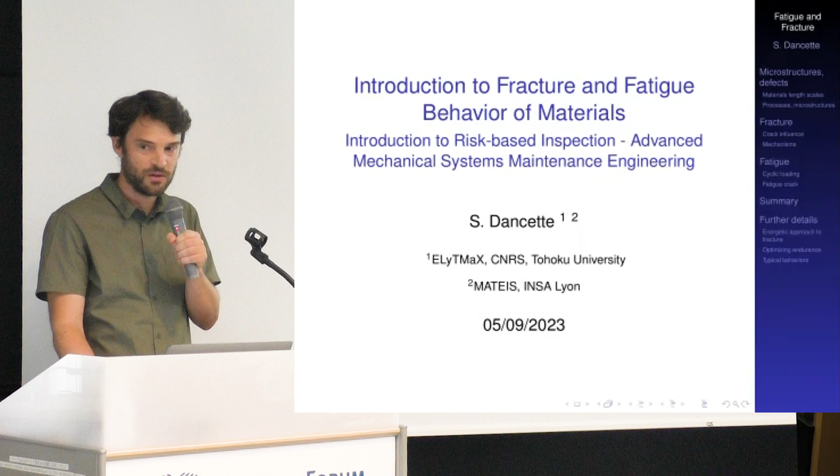This talk today will be an introduction to the basics of fracture mechanisms and fatigue behavior of metals, so the audience can be more familiar with where defects in parts or industrial components may originate from, at least from the material point of view. I will first give an introduction about materials microstructures and the way defects may arise from these microstructures and processes. Then I will talk a little about fracture mechanics, so how a material in the presence of a defect is going to fail by one mechanism or another. Finally, I will talk about fatigue behavior, the mechanical behavior of materials under cyclic loading, and the way a crack in this type of loading is likely to propagate in a material.

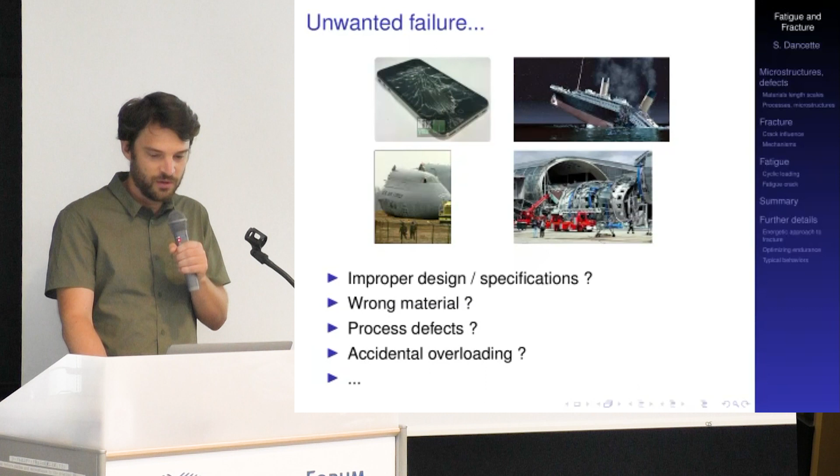But this is only one side of fracture, because fracture is also something you come across every day in your life. Without even knowing it, you use fracture as a way, for example, to open a can, like a Coca-Cola can. When you open food packaging, you are also doing fracture mechanics tests without even knowing it. There are many examples like this in everyday life where fracture is something really controlled, something that has been very deeply engineered, sometimes for many decades, just for people to be able to use it as a mechanism of achieving something in everyday life.

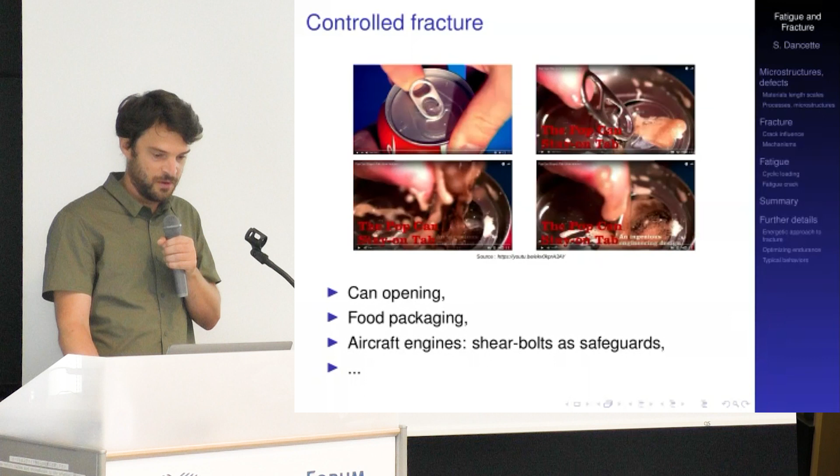Coming back to the objectives of this lecture, what we would like to do here is try to understand a little bit of the link that exists between materials processes and the resulting microstructures in different classes of materials, and some of the defects we can find in these microstructures, the defects that you will later have to monitor or assess in terms of risk of failure.

Based on this, we are going to look into the fundamentals of fracture mechanics and mechanisms of fracture in the presence of defects. Then, as I said before, we are going to talk a little about fatigue, cyclic behavior.

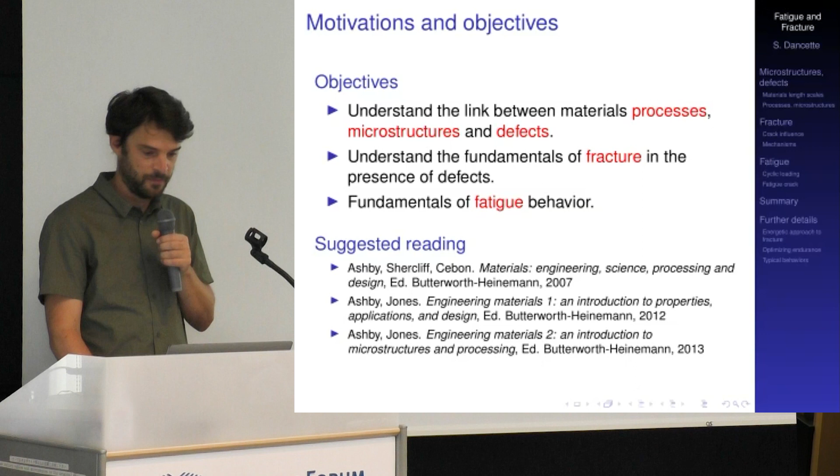Okay, so first I would like to remind you a little bit of the length scales and typical features that we can find in different families of materials. And maybe first what I have to do is to introduce or reintroduce these usual families of materials that we distinguish as engineers when we deal with materials.

So basically you know the metals, steel, aluminum alloys, titanium alloys. We also tend to distinguish these metals from the ceramics and glasses materials. And we will also distinguish metals on one end, ceramics and glasses on the other end, from the polymers and elastomeric materials. As a matter of fact, all of these classes of materials, when you look at them from a global point of view, they usually offer similar mechanical, electrical, and physical properties.

So all of these families of materials also usually exhibit similar transformation processes. And we will see just after this that from the transformation processes, potential defects will arise. And of course, the applications of these materials are also usually similar inside of a given family of material.

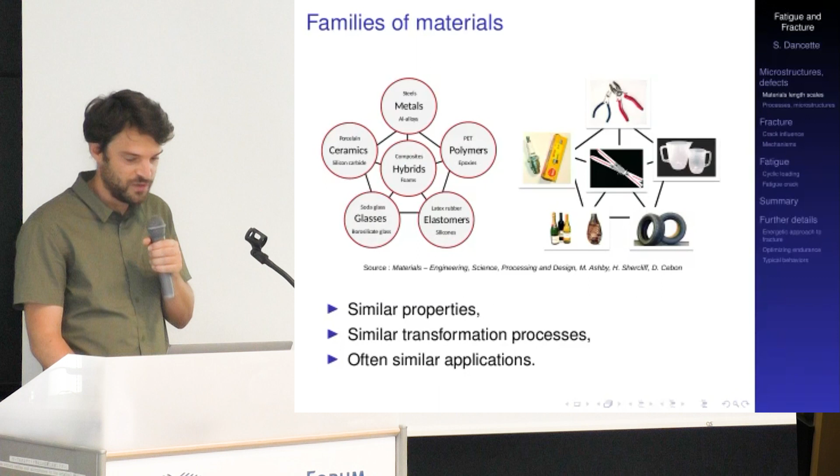So metals, ceramics and glasses, polymers and elastomers, and in between you have a whole new class of materials: hybrid materials, composites, foams, where you can use the architecture of the material on top of the intrinsic properties of these materials to engineer new types of behavior, new types of physical properties.

So coming back to the length scales, here with the example of metallic materials first, it is very important to bear in mind that the length scales in these materials go down to the nanometer or even picometer range when you talk about the atomic nuclei of the elements.

You will come up to, let's say, a few to the nanometer range when you talk about atoms themselves, and the way they arrange in space, especially in crystalline arrangements.

But as soon as you talk about atoms in these metals, you also start to talk about potential atomic scale defects like vacancies, missing atoms in the crystals, which may constitute the smallest scale of defect you would find in materials. So from the atom packing, crystallographic packing, you then come up to the upper length scale of grains.

So in metals, most of the time, for almost all metals, the microstructure is made of grains, inside of which you will find these atoms regularly arranged in a periodic way in these crystals. The length scale of grains is usually in the order of magnitude of 1 or a few microns.

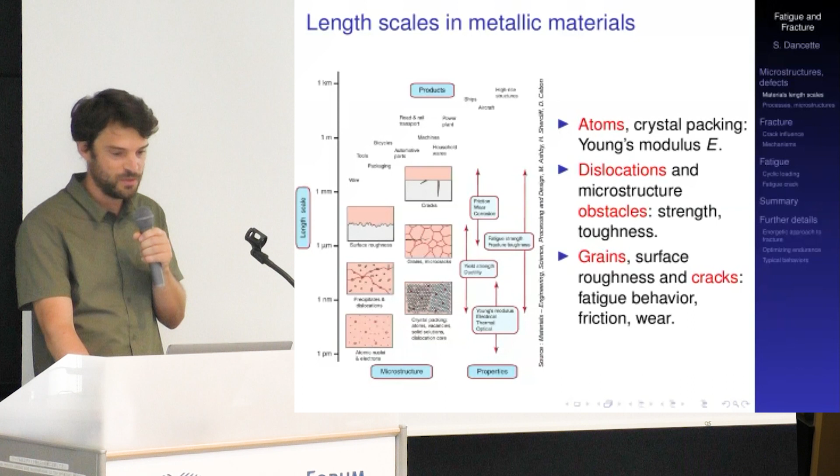So now we could perform the same type of analysis in ceramics and glasses. Again, in most ceramic materials we can find this crystalline structure, with the same typical length scale of a few microns, together with this scale of the grains, inside of which we can find the molecules and atoms constituting the ceramic materials.

Inside of the grains, again, you will find the length scale of the first cracks and first defects that will later on control the way the ceramics are going to behave under stress.

Compared to crystalline ceramics, the structure of glasses is amorphous by definition, so you don't have grains in glasses, but rather a random packing of atoms. Still, you will have micro cracks at the scale of a few microns, and these will also control some of the fracture mechanisms of glasses when loaded in a mechanical way.

And of course, at the top scale, you will indeed also find cracks and surface defects, just as you would find them in metals.

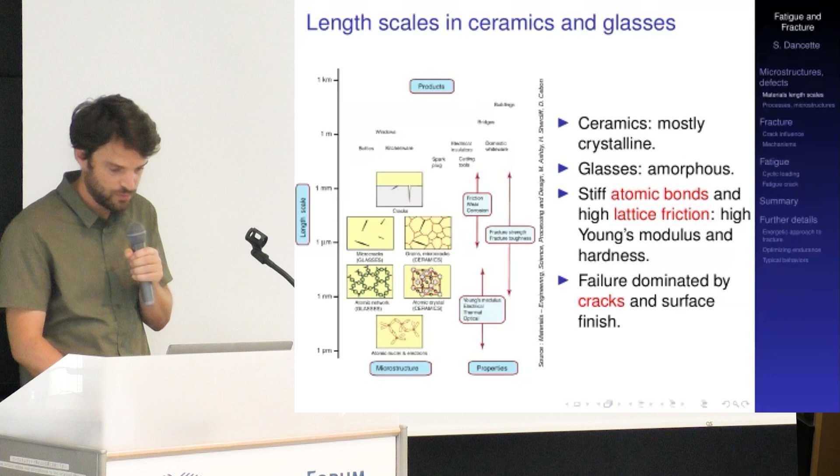Now we can talk a bit about polymers and elastomers. The huge difference of polymers and elastomers with respect to ceramics and metals is that the microstructure is not really controlled by atomic arrangement anymore, but rather controlled by the way the macromolecules, these long molecular chains in the polymer, are arranged in the material, sometimes with an amorphous structure, sometimes a semi-crystalline structure. All of this again takes place at length scales on the order of a few microns.

When you load these macromolecular materials under the effect of loading and temperature, you will sometimes start to initiate defects called crazes, where macromolecules start to locally rearrange under the effect of loading. These crazes or microcracks already constitute defects that will later impact the way the polymer behaves under loading and the way it will fail in the end.

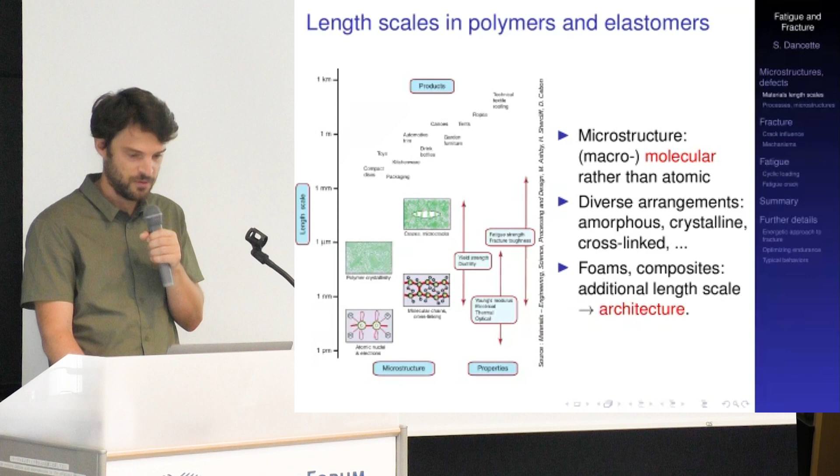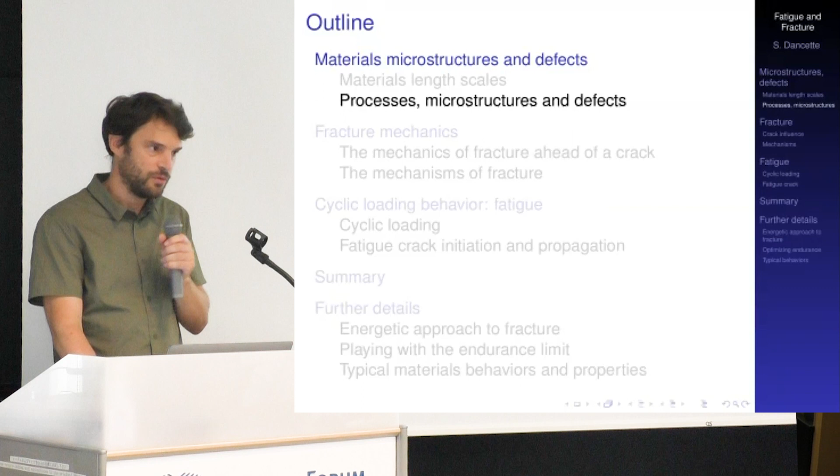So that was a short introduction about materials families. Now I would like to give you a few examples of processes, materials, and processing, and the way they may impact the type of defects we can find in these materials and microstructures.

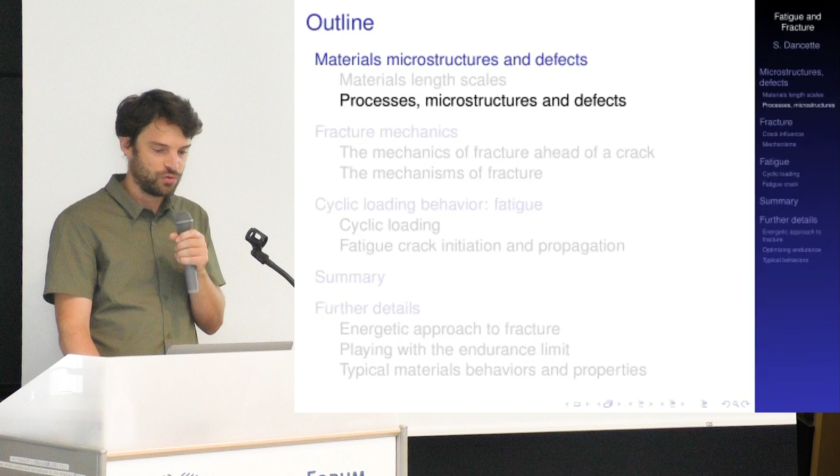One very common example is metal casting. You can find it in tons of applications, for example in the automotive industry, but also in the aeronautic industry. Metal casting basically consists of pouring liquid metal into a mold, for example a sand mold like this one. This liquid metal will simply cool down to room temperature, and during cooling it will solidify, ending up with a rather complex shape, the near net shape of the component you want to use in the end.

The problem with this, obviously, is that you have a liquid that will have to undergo solidification. And when you start to think about solidification, it implies a lot of metallurgical transformations and phenomena, starting, as illustrated here, from the way the germs, the very germs of solid, are going to initiate from the liquid. You can see in this illustration that the way the grains are going to grow from the liquid will be different if this happens on the mold wall, for example.

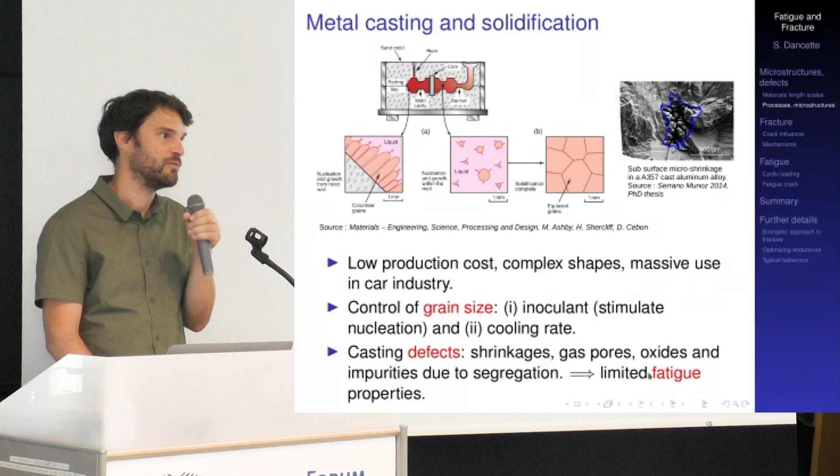Another usual type of deformation processing of metals and alloys is rolling. Usually metals, once cast into slabs, if you want to produce sheets or parts that will later be formed, you have to roll them, producing them in the shape of sheets. This implies some hot deformation processing, like this rolling process.

If you subject a metal to this kind of rolling process, there will be a strong evolution of the microstructure inside the material, from the initially equiaxed grains potentially found in the core of a cast slab. These grains will be severely deformed and severely reoriented in the course of the process.

This implies potentially several phase transformation or microstructural transformation mechanisms like recovery, recrystallization of the material, but also in steels, for example, there will definitely be some phase transformation, some change of crystal structure from high temperature to low temperature, and all of this will have a strong impact on the resulting microstructure.

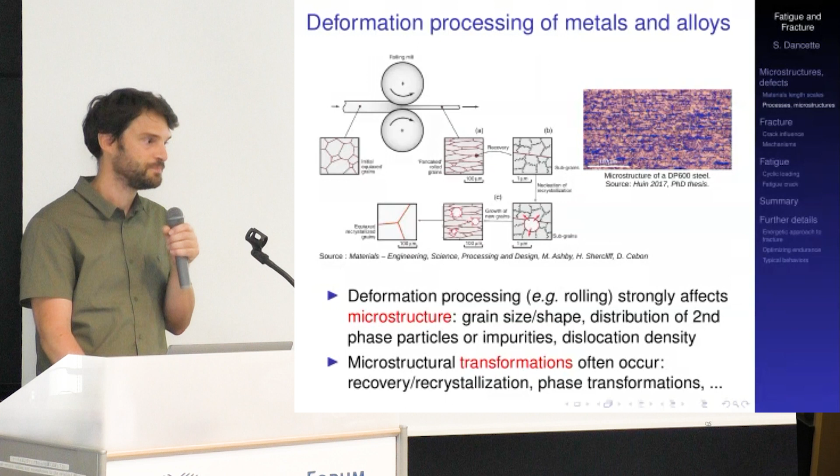Another usual example in metallic alloys is the case of heat treatment. Most metallic alloys, after deformation processing, which was itself after solidification, for example after casting and deformation processing, most of the time these metallic alloys are heat treated, with particular heat treatments, especially in order to optimize the strength of the material. This can be the example of an aluminum alloy, for example, here.

So the aluminum alloy that was casted beforehand, at some point, in the parts that will have an engineering interest, has to be heat treated by solution heat treatment followed by precipitation heat treatment. The goal of this precipitation heat treatment is to induce some second phases in the material, which will provide optimized strength.

Depending on the type of precipitation heat treatment, depending on how well you control the temperature or the time during this treatment, you may have several types of second phase particles, precipitates, ranging from coherent nanometric precipitates to coarser semi-coherent or incoherent precipitates.

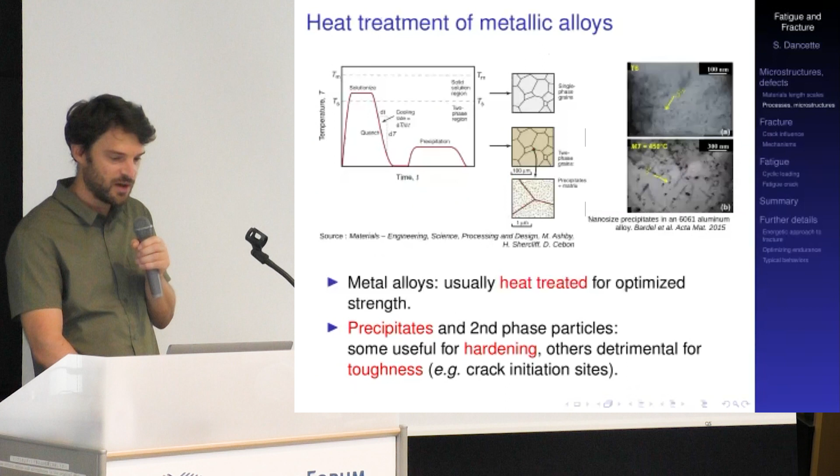This is usually also the case in aluminum alloys, which are usually optimized for strength thanks to precipitation heat treatments. When you weld these aluminum alloys, the base metal usually has a hardness and strength much higher than the potential hardness and strength of the material inside the weld. So this is, again, potentially a problem.

Besides this, with the welding process, you will commonly see several types of defects inside welds. We have here the example of a resistance spot weld in automotive steels. Resistance spot welding is widely used as a common welding process in the automotive industry for joining automotive sheets. In such high strength steel resistance spot welds, it's not unusual to see several types of defects, such as liquid metal embrittlement cracks or internal pores, which again may be harmful to the mechanical properties. This harmfulness has to be checked when dealing with a part or material that has been welded at some point.

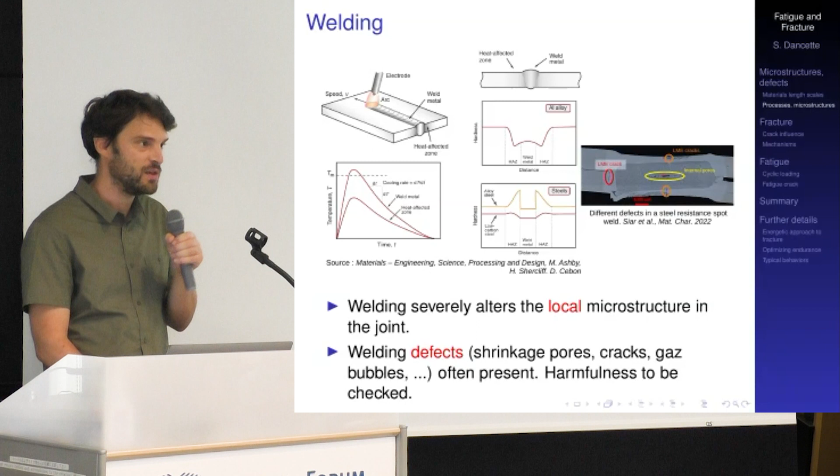Last example, in the case of polymer materials, thermoplastic polymer materials. In the case of polymers, again, most of the mechanical behavior is due to the arrangement of the macromolecules, the molecular chains in the polymers. And this is, of course, strongly dependent on the glass transition temperature.

If you deform the material close to the glass transition temperature, the molecular chains will have a lot of ease to reorient and reorganize upon loading. While if you do that at a lower temperature compared to the glass transition temperature, they will most likely have more difficulty reorganizing.

In that case, it's not uncommon to see defects like crazes found in such materials. It can be crazes when you load in tension, or shear bands when you load rather in compression. So when you load these polymer materials, due to the ease or unease of rearrangement of the molecules, there will be some kind of defects, or micro defects, occurring in the microstructure.

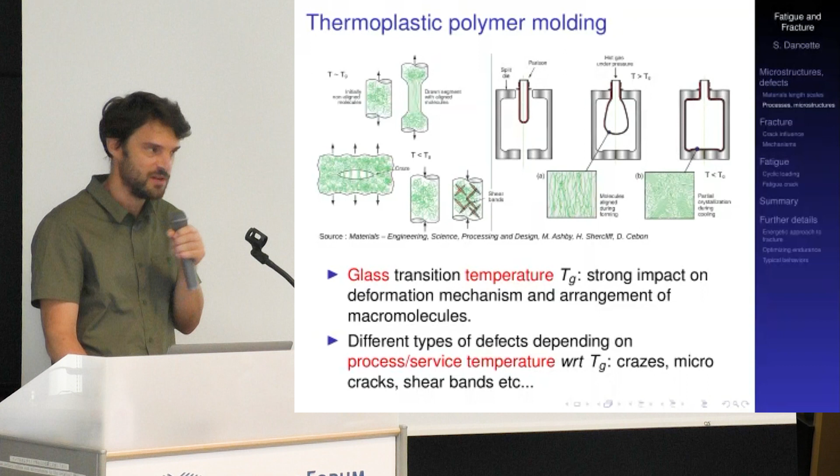So with these examples, I wanted to illustrate a few of these typical defects that we can find in engineering materials from the different families of materials. At this point, the question now is how does the material, once we have it in the end, behave in the presence of such a defect? Most of the time, materials will present some defects, sometimes micro scale, sometimes millimeter scale defects in the parts. We want to understand now a little bit of how this will impact the fracture and fracture mechanisms of the material.

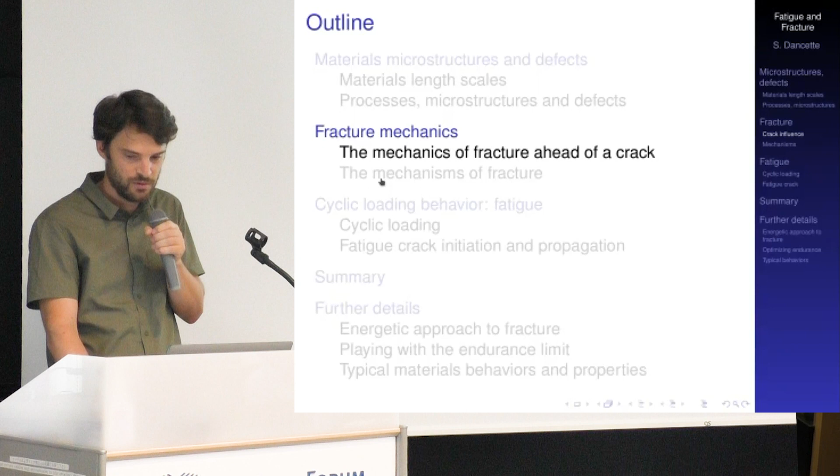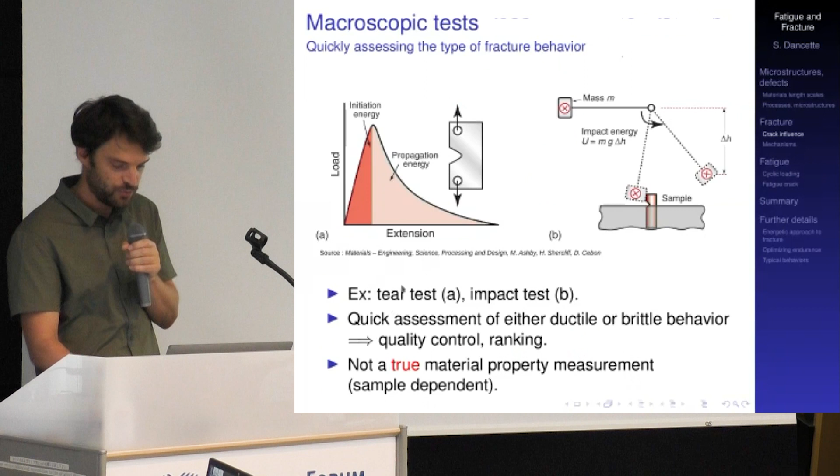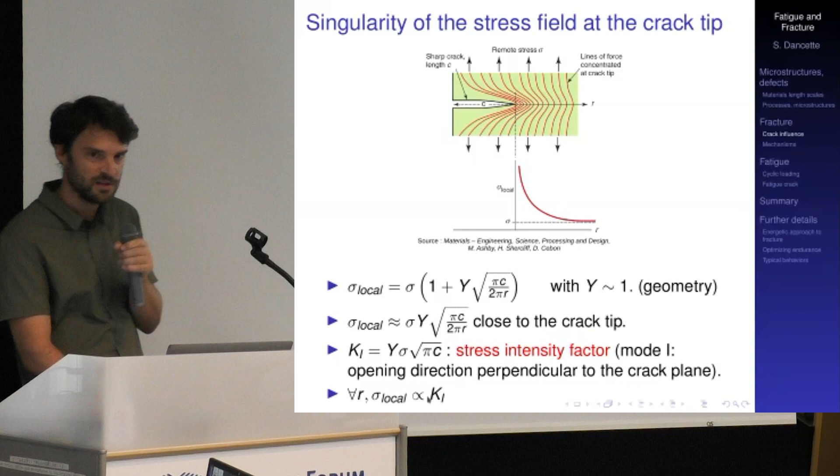This helps us because stress intensity factors are usually very well known in many engineering situations. There are several examples: samples with a continued through crack, a single edge notch, a crack submitted to internal pressure, or three-point bending. In all these common engineering cases, it is easy to estimate this stress intensity factor K, which depends always on the remote stress and the square root of the crack length, little c. Knowing this, we can come up with ways of measuring what we call fracture toughness.

To do that, we simply perform one of these tests, such as a tensile test with a given continued through crack in the material, or a compact tension test loading the sample with an edge crack like the one represented here. Because we know how the stress intensity factor evolves during these tests, in terms of stress applied and displacement, it is relatively easy to come up with the critical stress leading to fracture in that test and relate it to some critical level of the stress intensity factor.

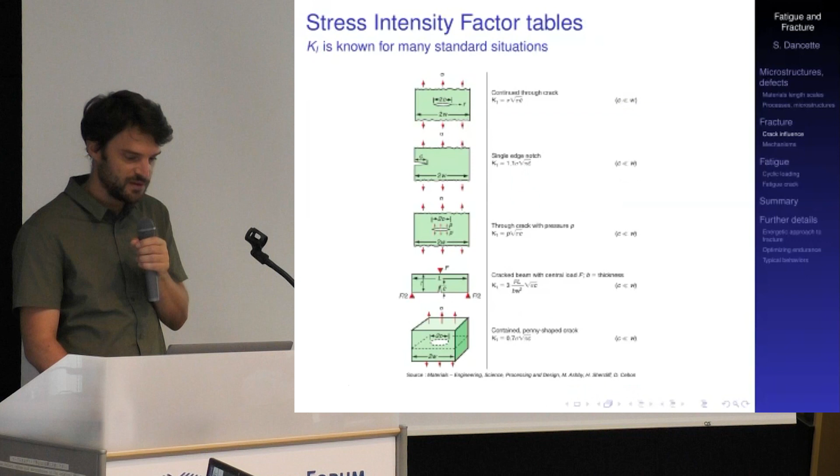Since we know the stress intensity factor, when we measure it at the fracture stress, we can come up with what we call the critical stress intensity factor, also called fracture toughness. K1C is the so-called plane strain fracture toughness of the material. Depending on the singularity of the stresses in the material, K1C is really a material property independent of the geometry of the sample. Compared to all the previous macroscopic estimates of fracture energy, which were not intrinsic material properties, K1C is an intrinsic material property that can be measured on one test and used on another test or part to assess when fracture will likely occur.

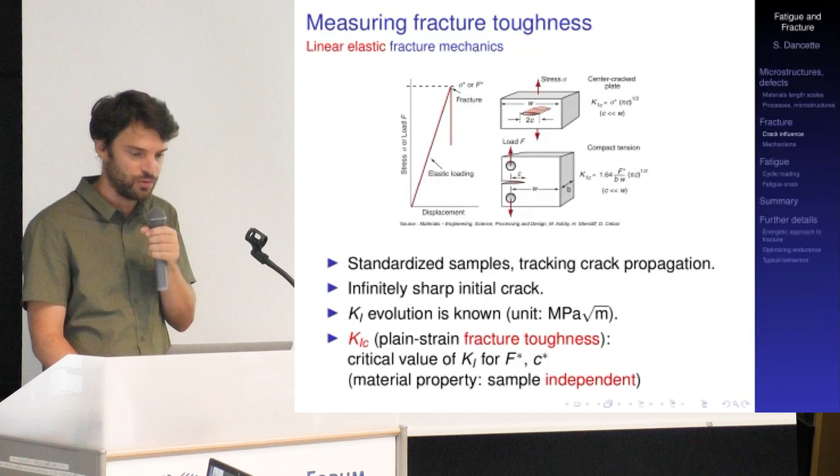There is this dual side of the fracture mechanism that we can now look at from the energetic point of view. Anytime you create a crack, you add additional surfaces in the material. When the crack propagates, or when you cut the cube here, you obviously create two new surfaces, and this is a necessary condition for a crack to propagate in the material.

This means the energy required to propagate a crack has to be at least corresponding to, but usually much more than, the value of the new surface energy created during the fracture process. So we have this surface energy of two new surfaces, and the fracture energy has to be a minimum of two times this fracture surface energy, times the increment of area during crack propagation.

Most of the time, the actual fracture energy dissipated during fracture is in fact much more than this, much more than 2 times the surface energy. This is especially related to the plasticity mechanisms and deformation mechanisms occurring during the fracture process, as we will see later. But another way of measuring the fracture properties of a material is what we call the mode 1 toughness. So toughness compared to fracture toughness, this is a little bit tricky because the previous one was called fracture toughness, which relates to the K1C value. When we talk in terms of fracture dealing with the fracture energy, we call it toughness, without the word fracture. Toughness, or the critical energy release rate, has to be dissipated in terms of energy per unit surface in the crack propagation. As a matter of fact, these two measures of fracture, the fracture toughness K1C and the toughness G1C, are related together, especially via the Young's modulus of the material.

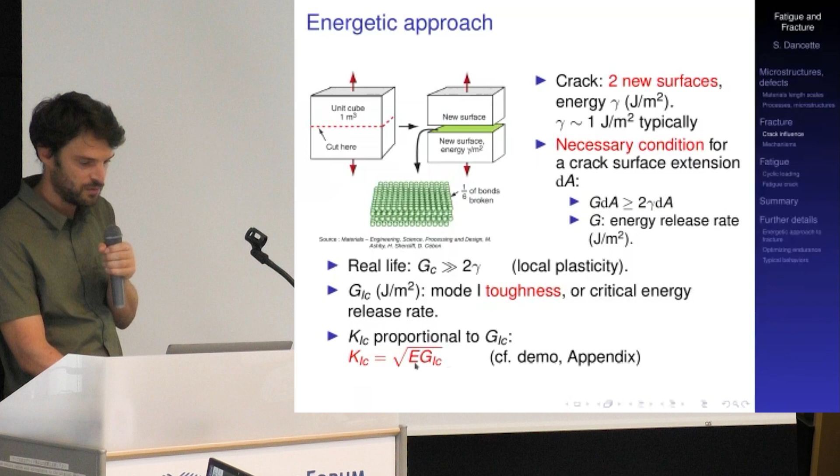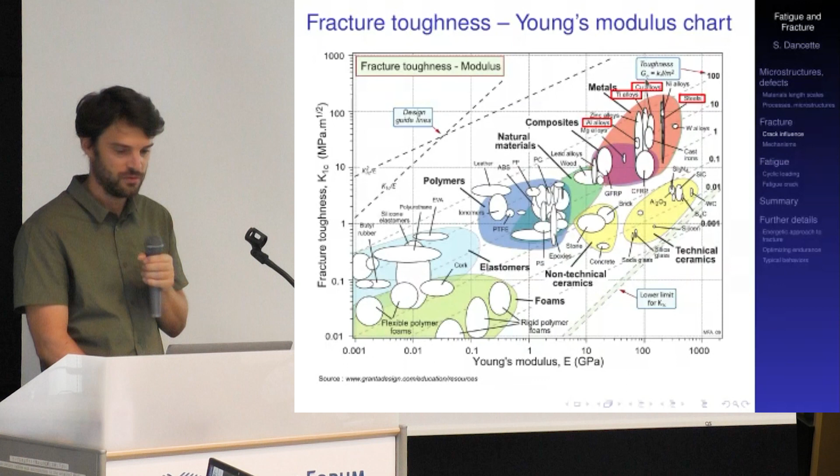Okay, so with this we are reaching a point where we want to describe what is the critical crack size that is indeed likely to yield fracture. We just described beforehand that the critical fracture toughness is related to the failure stress of the sample and the failure stress at a given crack size. So if we try to estimate the failure stress of a material at a given crack size, when the stress is in fact reaching the value of the yield strength, then if you come up with that equation where the failure stress has to be higher than the yield strength, then at the transition between these two, you can define the critical crack size.

So this means that in these engineering materials, the critical crack size that can be found in a piece is in fact heavily depending both on the fracture toughness, but not only on fracture toughness, it is also depending on the yield strength. Because obviously, if the yield strength of the material is very low, then the material itself will start to deform before cracking. A material deforming before cracking will not fail in a brittle way. But on the opposite, a material with a very low fracture toughness and very high strength will not have the opportunity to yield before fracture, and it will fail in a sudden and brittle way.

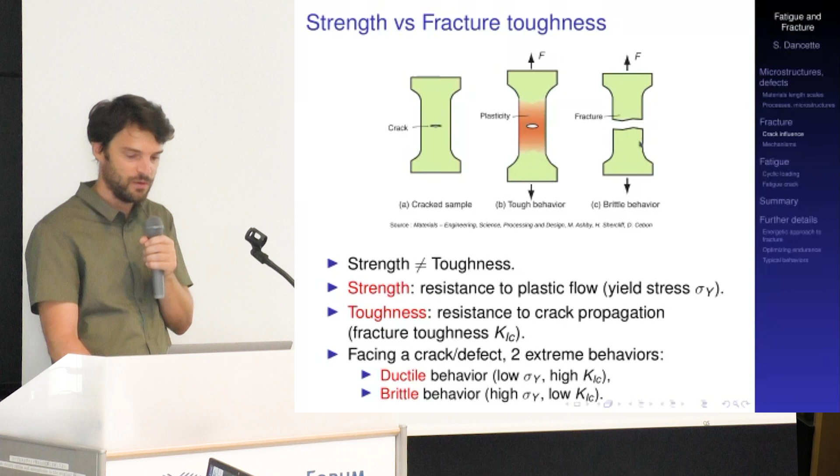So this is a usual relation that allows us to determine the order of magnitude of critical crack size in families of materials, which is again severely depending on both fracture toughness and the yield strength. As a matter of fact, damage tolerance in metals is very high. It is high because most metals have a very high toughness K1C, and sometimes small, sometimes a little bit large yield strength, but because of this high toughness, metals can accept cracks as big as a few millimeters in a structure, without these cracks being very detrimental to the in-service property.

As compared to this, ceramics have a very low fracture toughness. In these materials with a very low fracture toughness, the critical crack size is also very, very low. So in ceramics in general, even a very, very small defect, like a few microns of porosity or a few micro cracks in the grains, even such a very small defect can yield brittle and fast fracture.

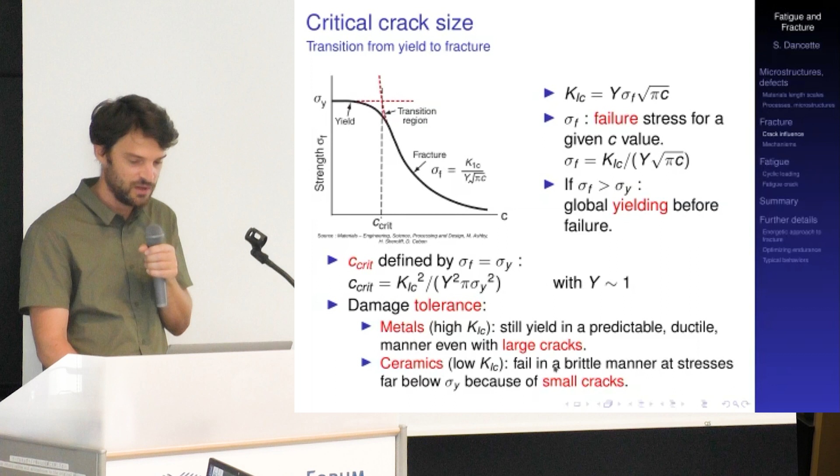But if you look at ceramics, most ceramics, and look at the values of fracture toughness and yield strength in these materials, defects as small as a few tens of microns will most likely be very detrimental for fracture.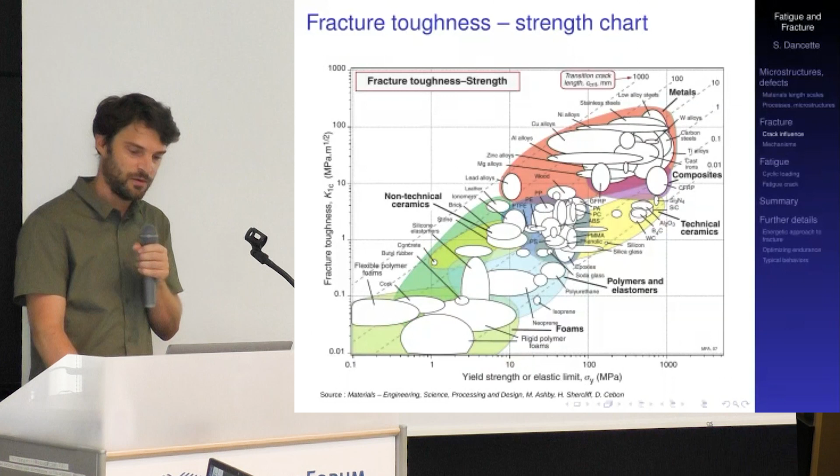So in ceramics, I have to hurry up a little since time is running. In ceramics there is another interesting fact: the strength of a brittle material such as a ceramic heavily depends on the way it is loaded.

If you load a ceramic in tension, as illustrated here, the behavior will most likely be dictated by the largest and baddest, the longest crack in the material. So if you load the brittle material in tension, you may have a lot of cracks inside it, but only the biggest one, and the one mostly perpendicularly oriented with respect to the stress, will be the critical defect that drives fracture.

As opposed to that, if you load the same material in compression instead of tension, you will not tend to open the crack, but because of the shear or compression loading type, all of the small cracks and defects present in the material will start to propagate in a stable way. The result of this stable propagation of cracks in compression is that the fracture stress, usually in brittle materials, might be as high as 15 times bigger in compression compared to tension.

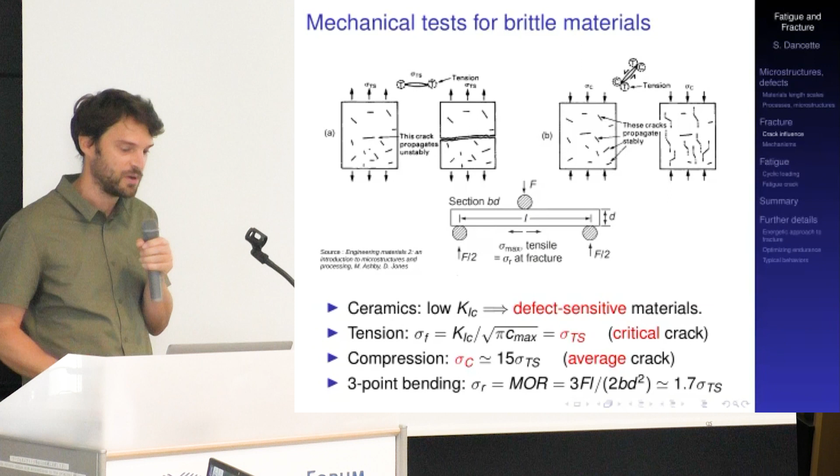So the same material, loaded in tension, will have a given fracture stress. Loaded in compression, this fracture stress might be as high as 15 times the fracture stress in tension, just because of the way these defects inside the material will either propagate stably or propagate critically in an unstable way in the case of tension.

I will not go too much into the details of statistical variation, but in one word: in these brittle materials you cannot define a unique value of strength when you load it in three-point bending, for example, or when you load a brittle material like a ceramic in tension. You will not be able to measure a given value of fracture stress if you test 10 or 100 samples; you will rather obtain a distribution of fracture stress.

This is just to mention that there is a usual law used for describing the survival probability of such brittle samples, called the Weibull law, which is an exponential law allowing you to define a stress sigma 0 and a Weibull modulus, with the value of the modulus driving how high the deviation and scattering of strengths might be among materials.

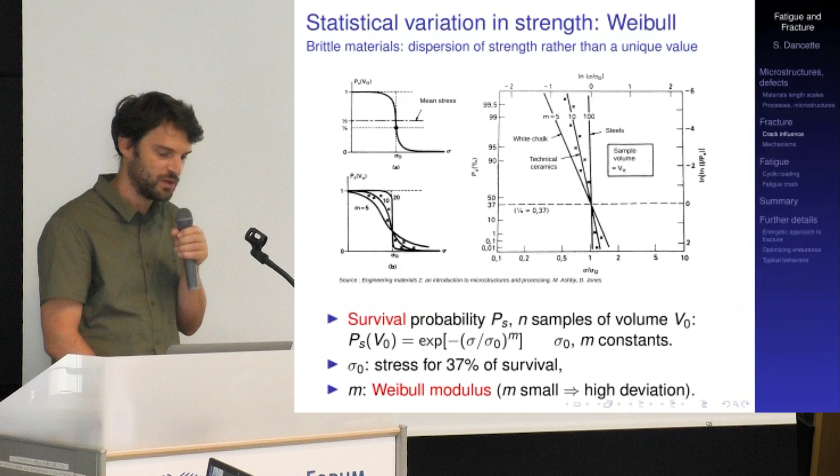I would like to introduce a bit more detail into the different fracture processes occurring at the microstructure scale in materials, starting with the way brittle materials tend to fail. In brittle materials like quenched steel, for example, or most ceramics, you will most likely see a brittle cleavage fracture.

In that kind of cleavage fracture, what you see is due to the stress concentration at the crack tip. So if you have a defect in the ceramic material, like these micro cracks we introduced before, at the crack tip there is underloading, some stress concentration.

In these brittle and hard materials, since they are very hard, they do not have the ability to accommodate plastic deformation ahead of the crack tip, so the stress can reach very high levels, very close to the level necessary to break the atomic bonds between the atoms. This is what we call cleavage, and in such materials, fracture occurs in a very sudden and fast way, with very sudden crack propagation as soon as the stresses at the crack tip exceed that critical level, which is in fact very close to the ideal strength of the material.

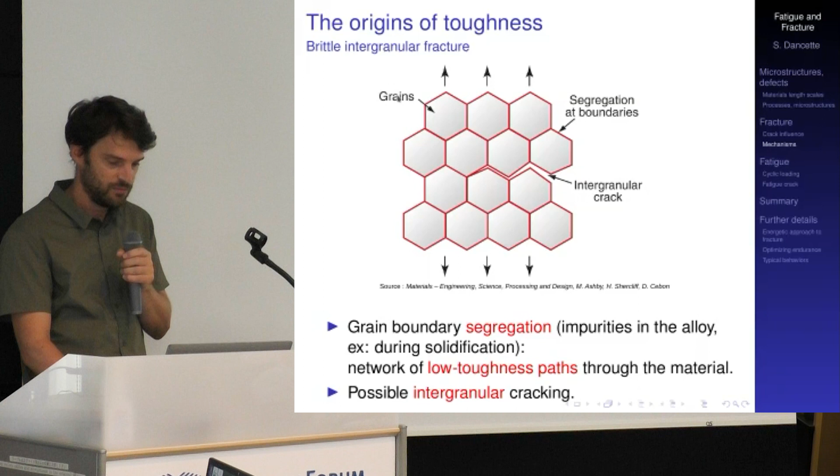I guess my colleague Nicolas will talk a little bit more about it later. In the case of intergranular fracture, because of the grain structure of most ceramics and metals, if you happen to have grain boundary segregations or impurities in the alloy that tend to develop at the grain boundaries, and if these impurities are brittle, which is not uncommon, then you have an easy path for the crack along the grain boundaries. This might be accelerated by the environment, for example a corrosive environment. So in intergranular fracture, the easy path for the crack is at the grain boundaries because of this segregation or impurities that may be present in alloys. Intergranular cracking is another example of brittle material fracture.

So now we come to ductile behavior, the ductile behavior of most metals for example. In this case, many engineering materials we saw before present some kind of second phase particles or inclusions inside the microstructure.

When there are such second phase particles, and we deform the material in tension, the material itself is rather ductile — most metals are ductile with a strong ability to deform plastically before fracture. What happens is that voids and cavities tend to initiate from these second phase particles or inclusions present from the chemical composition of the steel. These inclusions act as stress concentration sites, and at some point they allow cavities or voids to initiate in the bulk of the material.

When you continue loading the material, the voids will grow. At some point they grow so much that they start to coalesce, to bridge together — this is what we call growth, and the final stage where the voids coalesce together is called coalescence. This is what leads in the end to the final fracture of the material.

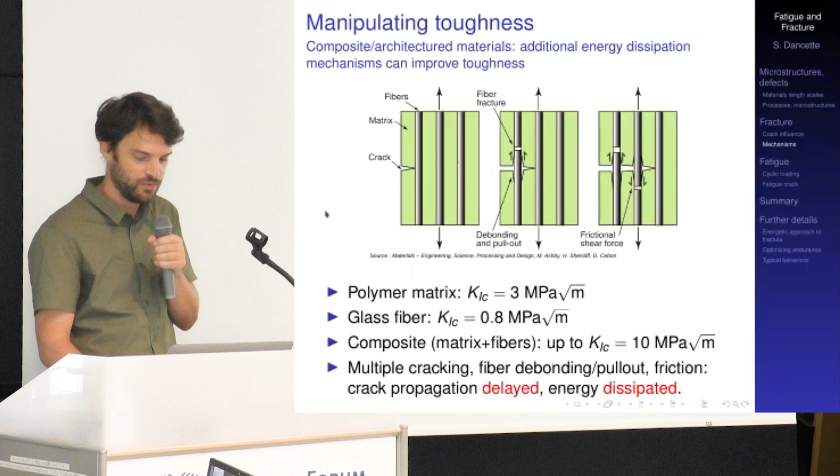So in these materials, architecturing—the way the phases are organized together—can be a very effective way to manipulate and increase, especially, the toughness of the material, and in that case to retard and delay crack propagation and its consequences in an industrial component, for example.

So I see that time is running. Only 20 minutes left, right? 15, yeah. Yeah. So I will say a few words about cyclic loading.

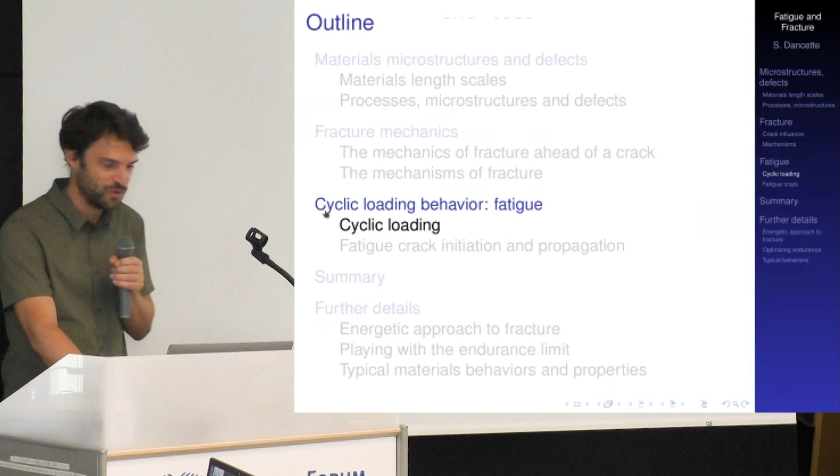Cyclic loading, I guess you're kind of familiar with this. It relates to the fact that a component during service loading will most likely not undergo only a monotonic stressing, but most engineering components will undergo that kind of cyclic loading with various amplitudes during their lifetime. And there are tons of examples of cyclic loading in everyday life.

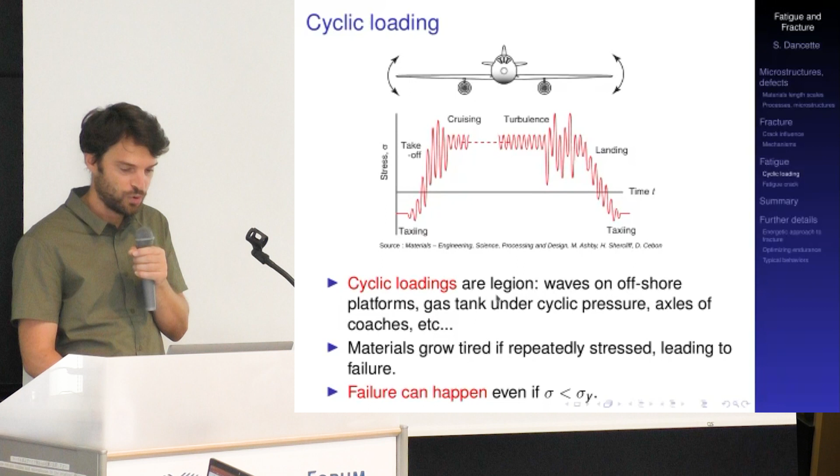But the fact is that what we just described was that fracture occurs at a critical stress for a critical crack size when you load the material monotonously. When we talk about cyclic loading, even a ductile material like a metal can fail by fatigue or cyclic loading, even if the stress is much lower than the yield strength. This is the problem of fatigue loading.

Usually, when we talk about fatigue, we distinguish acoustic vibrations, in which case the stress amplitude will be very small compared to the yield strength of the alloy. We can talk about high cycle fatigue, in which case the stress will still be smaller than the yield strength, and the material is expected to undergo a very large number of cycles before fracture—this is why it's called high cycle fatigue.

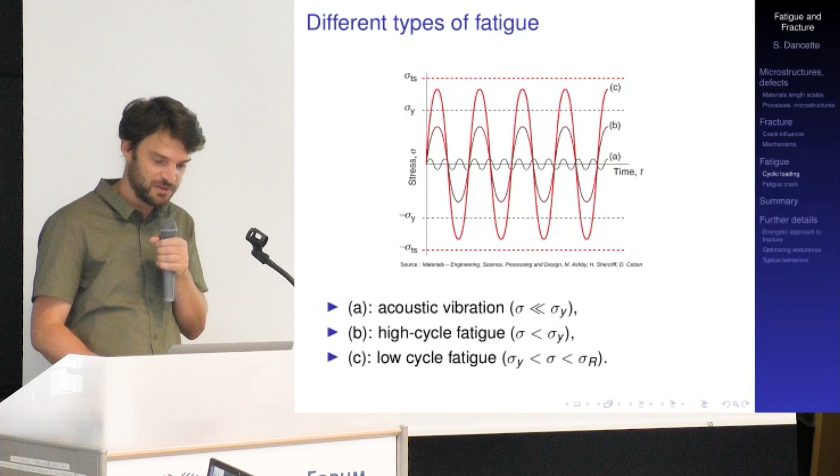On the other side, if you load the material with a very high stress level, especially high compared to the yield strength level, then we come down to what is called low cycle fatigue, in which case, if you load the material to a stress level close to the fracture stress in tension, you will not perform a lot of cycles before fracture. If you load it directly to the tensile strength, you will only perform one cycle of loading before fracture. So: acoustic vibration, high cycle fatigue, low cycle fatigue.

All of these—it is common to find information about material behavior in terms of fatigue endurance with the so-called Wöhler curve, or endurance limit. This is a graph in which you plot the amplitude of stress. If you load the material using cyclic loading, you can define the amplitude of the stress as sigma max minus sigma min over 2.

You can define the mean stress as sigma max plus sigma min over 2. And you can also define the loading ratio as sigma min over sigma max.

When you talk about the Wöhler curve or endurance limit, this usually refers to zero mean stress, so cyclic loading centered about zero stress, 0 megapascal. In this kind of graph, you typically describe how many cycles to fracture are required at a given stress amplitude. If you load the material at the tensile strength, already at one cycle the material fails. But if you load it at a stress level that is very low, especially compared to the yield strength, it is not unusual to reach as much as 10 to the power 7, 8, or 9 cycles before fracture.

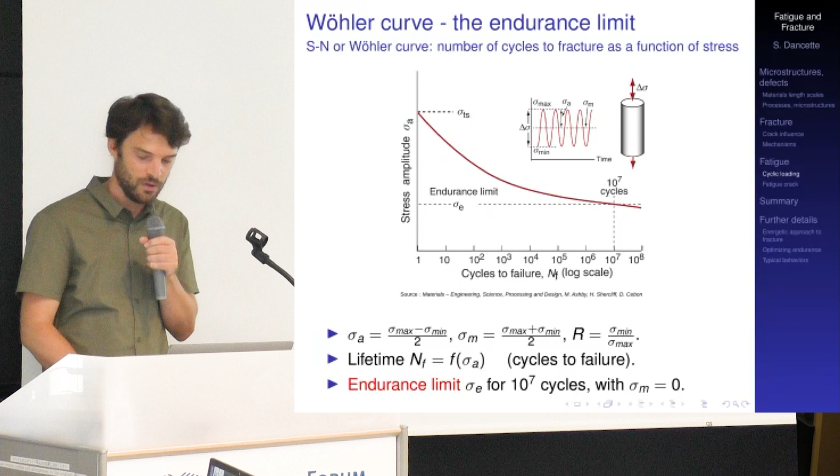So maybe I will drop this in the interest of time. Usually real life fatigue is not at constant stress and not especially at zero mean stress, but can occur at a positive or negative mean stress. It can also occur with various amplitudes of stress along the lifetime, and many examples and analytical relations allow us to assess the endurance of a part when the material is not loaded at constant stress amplitude and at zero mean stress. Anyway, I will not go too much into the details here.

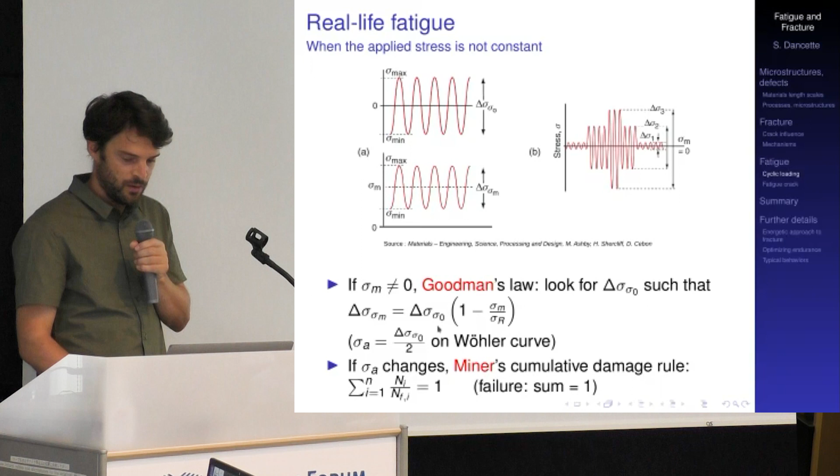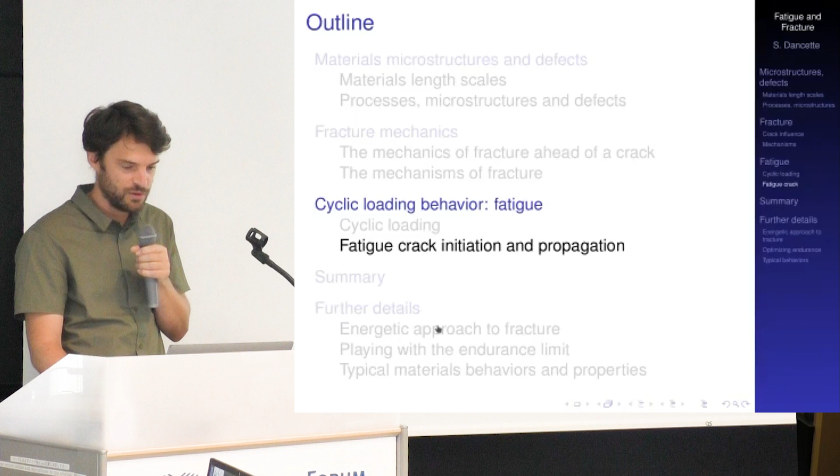I want to spend a little time talking about how the crack initiates and propagates in a material when loaded under cyclic loading. Most of the time when we talk about metals during fatigue loading, it is usual to distinguish three stages of fatigue cracking.

The first stage is the crack initiation stage. In a material that didn't have big defects at the surface, even with a polished fracture surface, the initiation stage will occur when local slip bands start to develop at the scale of the surface roughness. Because of the roughness of the material, there will be a local variation of the local stress, which yields to some local gliding of dislocations in the vicinity of a small pre-defect. This is what is usually called persistent gliding bands.

So in this way, because of local gliding, even with a material that was close to smooth in the beginning, plasticity around this surface roughness will start to develop what we call persistent gliding bands. These persistent gliding bands may occur at several locations on the material, but at some point, one of them may take advantage over the others, and this most critical one will later propagate.

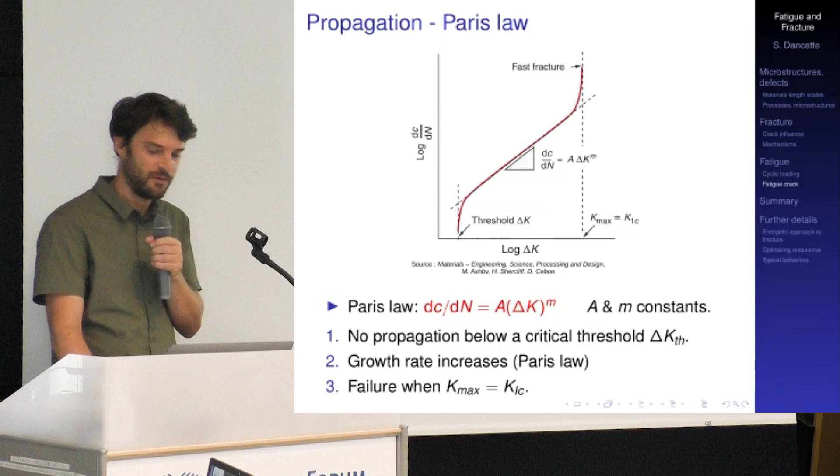This is usually described with the Paris law. This fatigue propagation law describes how the celerity of the crack increases, on a log scale, as a function of the increase of the stress intensity factor, which is itself increasing because of the increase in crack size during fatigue propagation. This Paris propagation law is quite useful for assessing fatigue propagation in materials exhibiting pre-cracks.

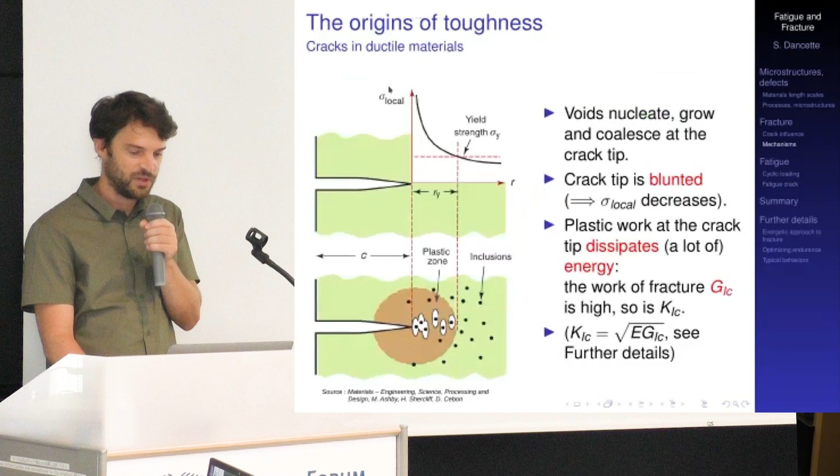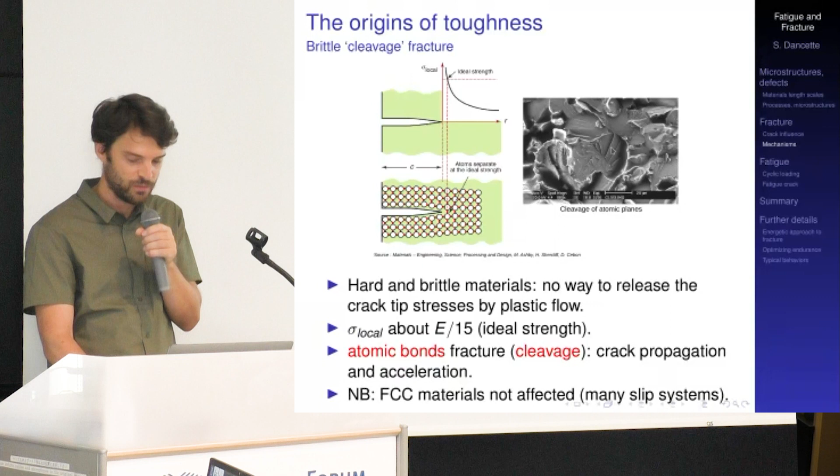This is, I think, the last slide. Just to tell you that it is very common in fracture investigation, especially fatigue fracture, to look at fracture surfaces. We already discussed fracture surfaces in the case of ductile fracture behavior, with the dimples we can see using scanning electron microscopes. We can also analyze the features of cleavage fracture just by looking at fracture surfaces in a scanning electron microscope. But if we do the same in the case of fatigue...

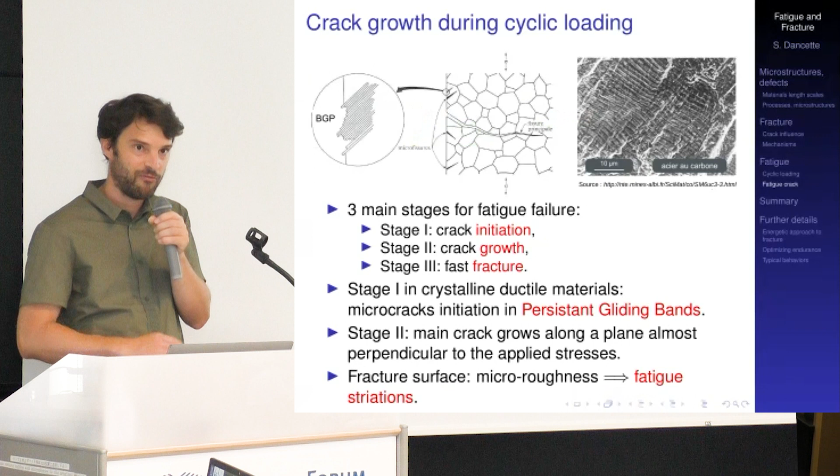...then if we look close enough, we can distinguish these fatigue striations, showing how fast the crack was advancing during the loading process. And if we look at the fracture surface globally, it offers many details that would allow, for example, the forensic examination of the causes for fracture.

It is not unusual to be able to retrieve the initiation site for the fatigue cracks that led to fracture, to distinguish on the fracture surface how fast and how long the crack could propagate during fatigue crack propagation in a stable way, and to distinguish in the end the final domain in which fast, catastrophic fracture occurred. So again, the last message here: a lot can be learned when you look at the fracture surfaces of materials, even in the case of cyclic loading.

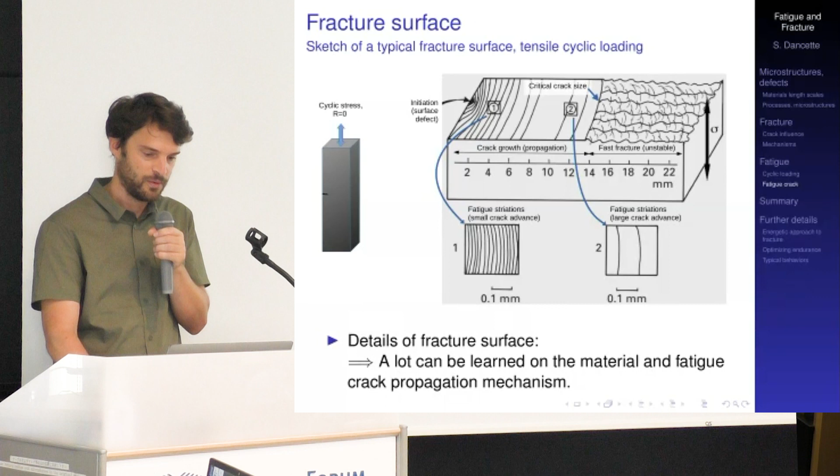So with this, I have to conclude. I tried to show you today that all materials, all classes of materials, depending on how they were produced, usually contain defects. Defects may be small or large, depending on the way the material was produced. And what makes a difference between materials is the way they behave in the presence of such defects when loaded mechanically in tension or compression, so when loaded in service conditions. We had to distinguish between ductile behavior and brittle behavior.

We also said that one of the most important properties for describing fracture properties is this fracture toughness, K1C, or its dual analog, this J1C fracture energy or toughness. In the case of fatigue fracture, we presented that even at low stress levels, the cyclic loading of a material can propagate even very small initial cracks, small initial defects in the material. These small defects can propagate and can be described in terms of propagation using a propagation law, the Paris law, for example.